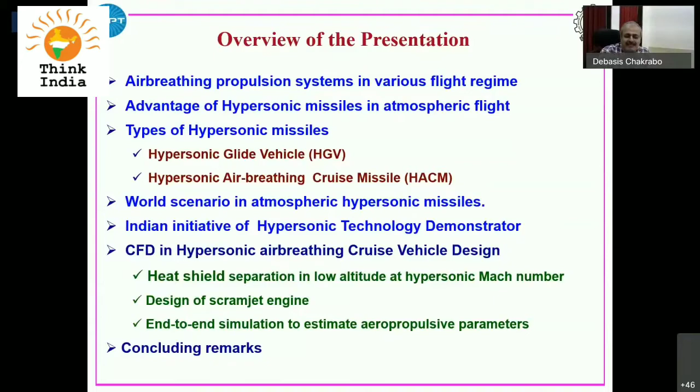Now coming back to how an aerospace vehicle moves in the air - there are four forces: thrust, drag, lift, and weight. Thrust must overcome drag, and lift must exceed weight. If these conditions are met, then a vehicle can fly in the air.

What is thrust? In aerospace propulsion, fuels are burned in the engine and this hot gas is expanded through a nozzle, or sometimes some portion is used to run the turbine and some portion produces thrust. This concept of thrust is very simple.

It is based on Newton's two laws of motion: the second law, force equals mass times acceleration, and the third law, for every action there is an equal and opposite reaction. Thrust is nothing but the difference between the inflow momentum and the outflow momentum. In aerospace propulsion, the chemical energy in the fuel is converted into thermal energy by reaction, and the thermal energy is converted into kinetic energy.

For an air breathing engine, thrust is defined using m dot, the mass flow rate, v the velocity, p the pressure, and a the area.

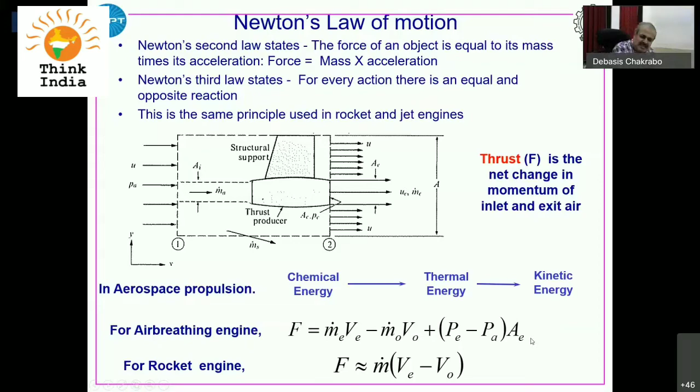Now, if you look at all aerospace engines, they can be classified into two categories: air breathing engines and rocket engines. In air breathing engines, we use atmospheric oxygen to burn the fuel, while in rockets, we carry the oxidizer and fuel on board. Because we are not carrying the oxidizer and are using atmospheric oxygen, the air breathing engine is very efficient compared to the rocket engine.

The various kinds of air breathing engines are turbojet, turbofan, turboshaft, turboprop - these are all in the low speed region. If we increase the speed, because man's aspiration to fly at higher and higher speed is always there, and this is challenging, at higher speed we get Ramjets.

I will briefly explain the Ramjet. The other area is solid rocket, liquid rocket, and hybrid rocket, but I will not be touching upon rocket propulsion in today's lecture.

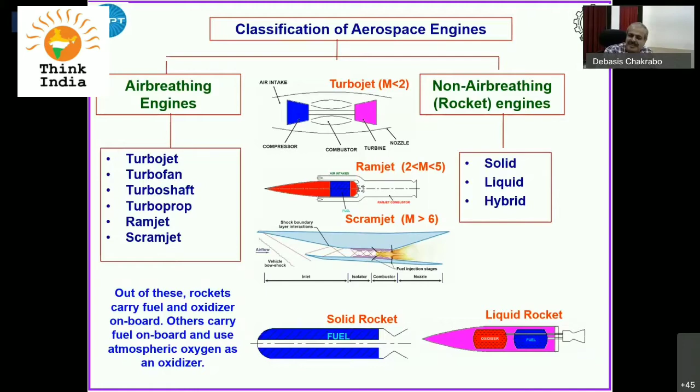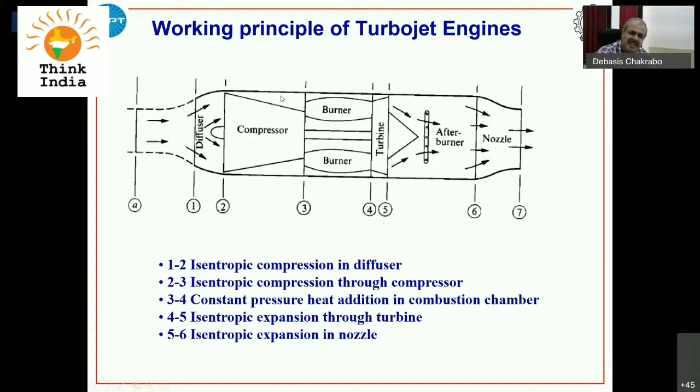Now, how does this work as we fly in the aircraft? How does the engine work? The flow enters the engine through a diffuser, the intake. Then this flow goes into the compressor, where the pressure increases. That high pressure gas is put into a burner, the combustor, and there we get high temperature. That high temperature, high pressure gas is used to run the turbine, and the turbine is required to run the compressor. This hot gas is then expanded through the nozzle to get thrust. This is the working principle of the turbojet engine: inlet, compressor, burner, nozzle.

Now, if you increase the speed, suppose going to Mach 2, twice the speed of sound, nearly 600-700 meters per second. That is the velocity.

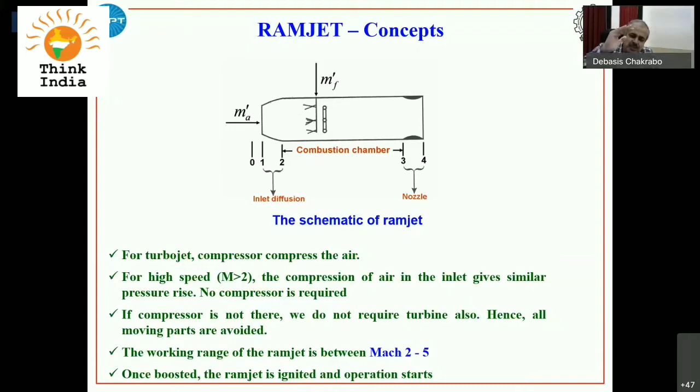If we can compress the flow to a subsonic value, we get a pressure rise, similar to what we get across a compressor. So if we fly at higher speed and decelerate the flow properly through an intake, we don't require a compressor. If we don't require a compressor, we don't require a turbine. So all the rotary systems can be dispensed with. We get a very simple system: intake, combustor, and nozzle. This is a very efficient propulsion system in the range of Mach 2 to 5. It has to be first boosted, and then the ramjet is ignited and operation starts.

So there are many types of ramjet. In DRDO, we developed a few ramjet powered missiles, and you must have heard the names Akash, BrahMos, which have been put into service. Some flight videos I would like to share with you.

This is the Akash flight trial, a very short video.

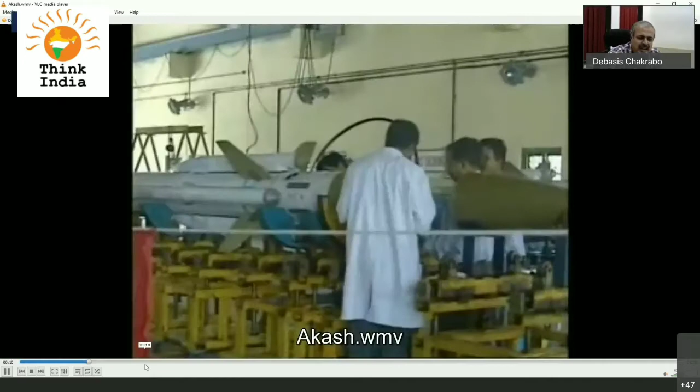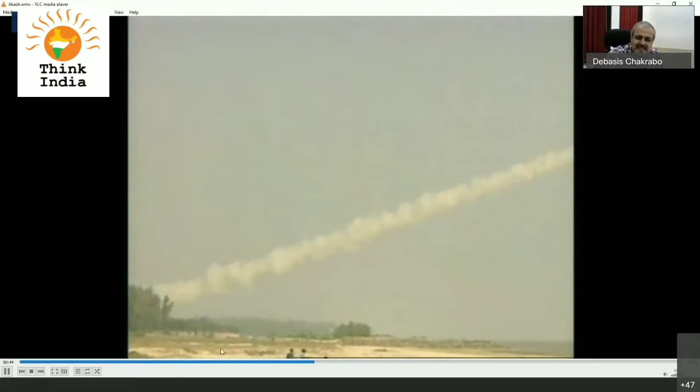There's a lot of other stories; sometimes I'll tell you how it works. We have worked quite a long time to develop this. It is a totally indigenous system, and it has been deployed in various parts of our country to safeguard the territorial integrity of the nation. It is one of the major workhorses for both our Army and Air Force.

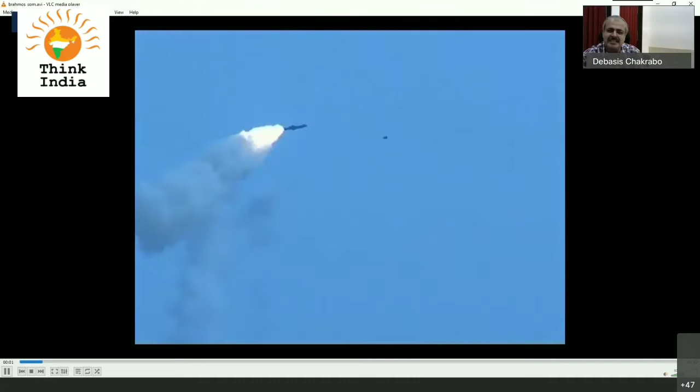Another video I would like to show is the liquid fuel ramjet. This is BrahMos, developed jointly with the Russians. This is some of the flight trial footage.

Now we have mastered the technology of ramjet propulsion. If we increase the speed further, as I mentioned, ramjet is very good in the Mach 2 to 5 range. It is a very good, efficient propulsion system.

But if you want to fly at even higher speed, suppose we get into Mach number 6. If we again decelerate the flow, the pressure increases, which is desirable, but at the same time temperature also increases. In very high speed flows, if the temperature increases, we cannot add fuel to that stream, because most of the energy will go into dissociation. So on the other hand, we cannot decelerate the flow to a subsonic value.

So we have to keep the flow supersonic, and we have to add fuel, and the reaction has to take place. Now, if the speed is higher, the residence time of the oxidizer in the combustor is very small. So in that short time, how do we ignite the fuel and release the energy? That is the real challenge. This Scramjet propulsion is, I would say, state-of-the-art technology. Very few countries have mastered it, and this is the power plant for every hypersonic missile.

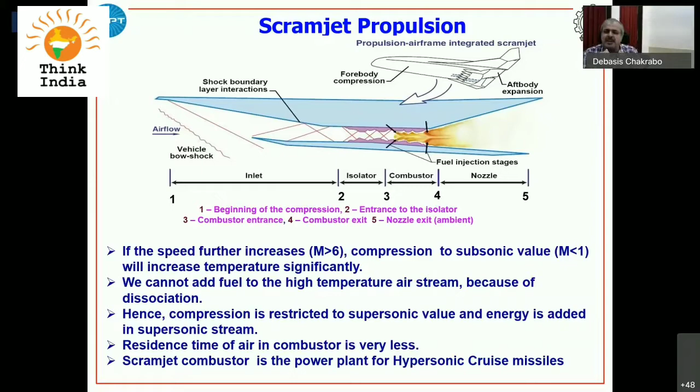Now, if you look at the performance, I've just compared that. I told you that in various Mach number regions, various propulsion systems work. So this is the turbojet, this is the ramjet, then the scramjet can work for a longer, larger Mach number range. And performance-wise, it is also much superior to the rocket engine.

Just to give you an example, for a rocket, liquid or solid, the ISP, the specific impulse, which is the parameter for every fuel, is of the order of 300. The maximum a cryogenic fuel will get is 400, 450. But in air-breathing engines, I mean the scramjet or the ramjet, we get an ISP of the order of thousands or more.

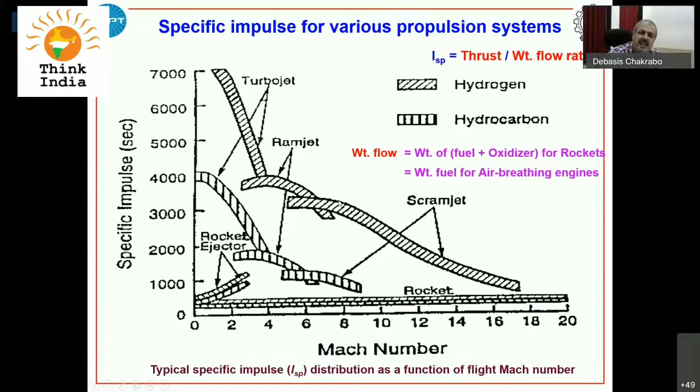And why do we need hypersonic missiles in atmospheric flight? The first thing is faster response. Suppose we have to travel 300 kilometers and attack some enemy position. If we go at subsonic speed, like 800 kilometers per hour, it will take 22.5 minutes. If we increase the speed, it will reduce to 5.2 minutes, and at hypersonic speed 2.2 minutes.

Now, this advantage will be greater as the distances increase. If we have to travel 1,000 kilometers in a subsonic missile, it will take 75 minutes; a supersonic missile like BrahMos at Mach 2.8 will take 17 minutes; and the hypersonic Mach 6.5 missile we are trying to develop will take 8.8 minutes.

I'd like to share one small incident with you. In 1998, American intelligence found the hideout of Osama bin Laden, the terrorist. They fired their Tomahawk missiles from the Persian Gulf position. The Tomahawk missiles were traveling at subsonic speed, and it took nearly 2 hours to come from that base to hit these caves in Afghanistan. By that time they also got the news, and they left the cave. Although the missiles came and destroyed those caves, nothing could be done to Osama bin Laden.

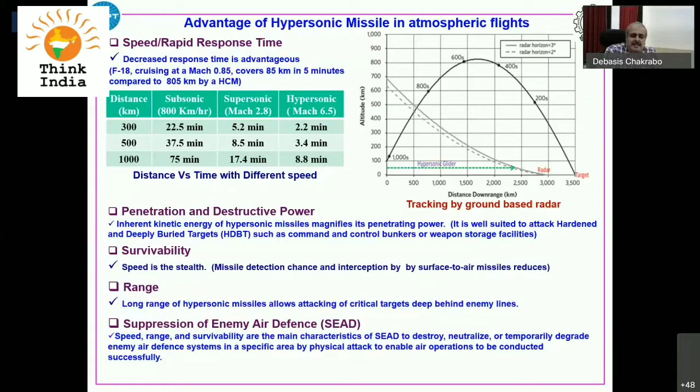Now, there is another advantage: because it is traveling at very high speed, like Mach 6, it has tremendous kinetic energy, and the penetration power is also very high. So these types of targets include time-critical targets, like enemy forces in transit, terrorists fleeing in a vehicle, mobile theater missile launchers, mobile surface-to-air missiles, high-value military cargo, mobile command and control vehicles,

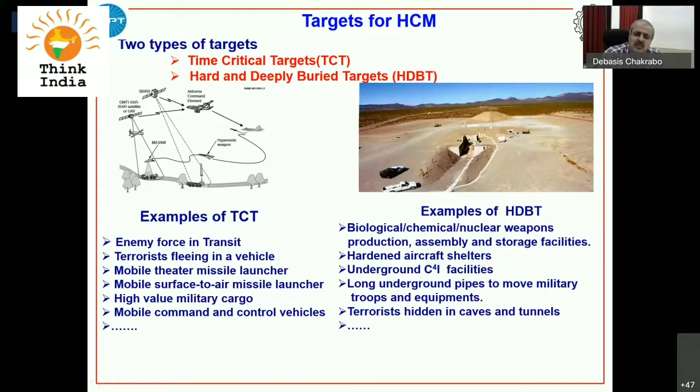and then hard and deeply buried targets: biological, chemical, and nuclear weapons production, assembly and storage facilities, hardened aircraft shelters, command centers, underground C4I facilities, and the list goes on. For these kinds of targets, conventional missiles are not very useful. We have to develop hypersonic missiles for this.

If you look, there are two types of hypersonic missiles. One is called the hypersonic glide vehicle. In the hypersonic glide vehicle, we take the missile to some altitude, and then it does aerodynamic maneuvering, comes back and hits the target. But there is no propulsion. On the other hand, in hypersonic cruise missiles, we have active propulsion until the end, up to the target. If you have propulsion, you can maneuver the missile much better.

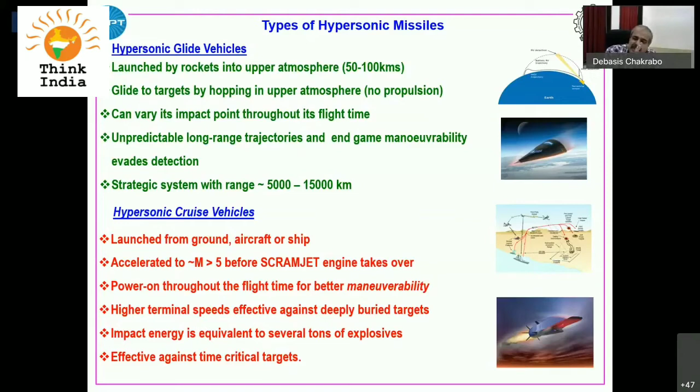So the hypersonic glide vehicle, by its higher speed, avoids any interception. And the hypersonic cruise missile has both speed as well as power, so that it can maneuver. And if you look at the world scenario in hypersonic glide vehicles, Russia has developed Avangard.

It reaches speeds up to Mach 27. These things were developed in the 2015-16 time frame. And USA has developed HTV-2. This will also go up to Mach 20, and the range is of the order of 7,000 kilometers.

China has also tested the WU-14 in 2017. In India also, we are developing the hypersonic glide vehicle. I'm not going to talk about it, but in this presentation I will mostly discuss the issues of hypersonic air-breathing cruise missiles.

Now, in hypersonic cruise missiles, the USA has developed two major programs. One is called X-43, with hydrogen fuel, and one is X-51, with hydrocarbon fuel. For military applications, hydrogen fuel is not preferred because of space limitations. Hydrogen requires a very huge tank, so the drag will be more. For space programs, hydrogen can be used.

In this mission, they took the booster and the cruise vehicle on the B-52 bomber. They released it at nearly Mach 0.8 to 1.2. Then a Pegasus booster took it to the Mach 6 or Mach 7 condition, and they demonstrated the operation of the X-43.

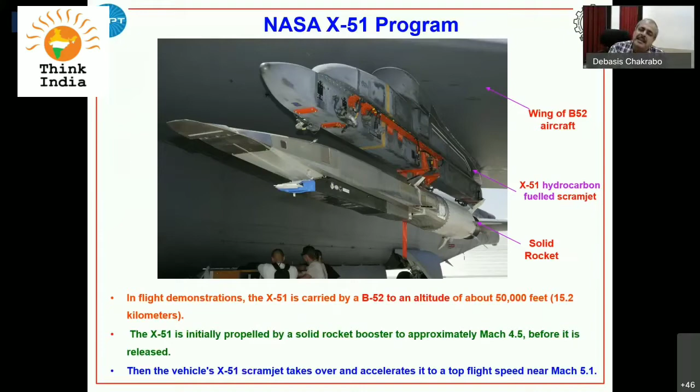Just to summarize, a lot of countries are developing these. It started with the National Aerospace Plane in the USA, and a lot of technology was developed, but finally the project was stopped and there was no flight trial. The USA and Russia together developed a NASA-CIAM test. Australia has done some flight trials of the scramjet engine, but they don't have much practical relevance because it is in captive mode. They put the scramjet engine in a sounding rocket and tested it.

HIFiRE, Australia, is another smaller-scale one. X-51, I have already told. Some 2-3 years back, ISRO also tested a scramjet engine. That is also a captive trial: they put two engines on a sounding rocket, and without separating the engines, they tested and demonstrated the scramjet engine.

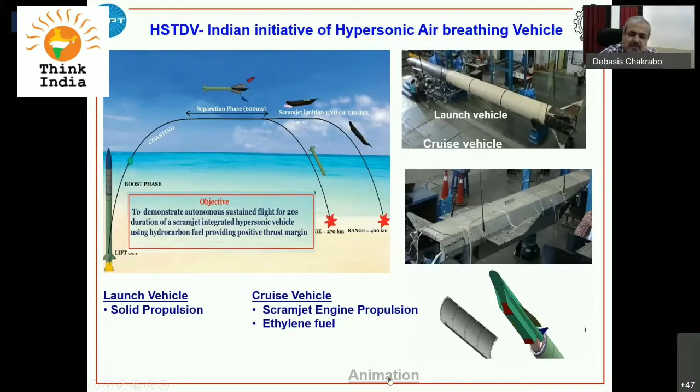And now how we have solved that problem, how we have designed it, and because in our country we don't have that kind of test facility to do those tests, we have to depend on our numerical methods. I will explain that. And the whole concept of this HSTDV, I would like to explain through an animation.

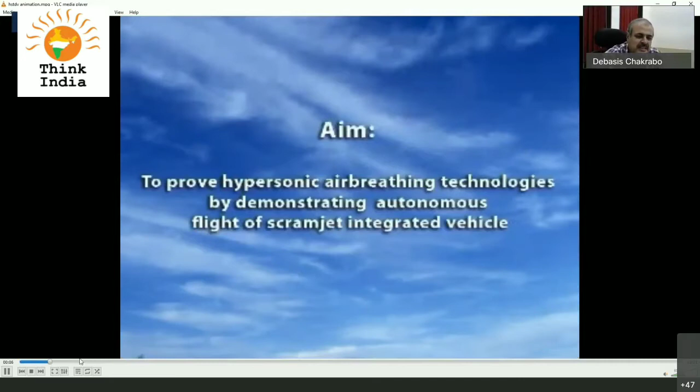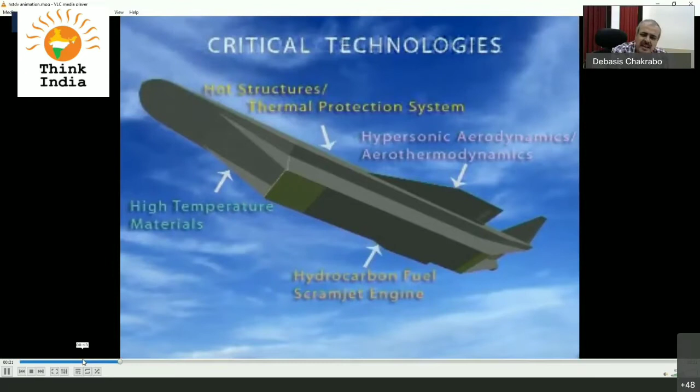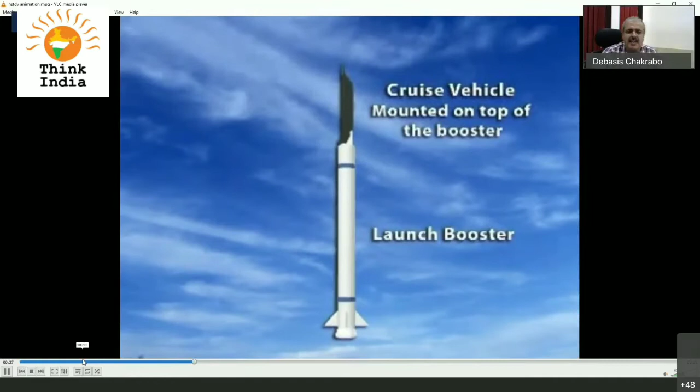This is the cruise vehicle where the Scramjet technology will be tested with the hydrocarbon fuel. There are a lot of critical technologies like hypersonic aerothermodynamics. These are the vehicle forebody, intake, combustor, wing, tail, and the Mach 6.5. This is the launch booster. We have put the cruise vehicle over it, covered it with the heat shield, and then we are firing from the ground with a ground launcher.

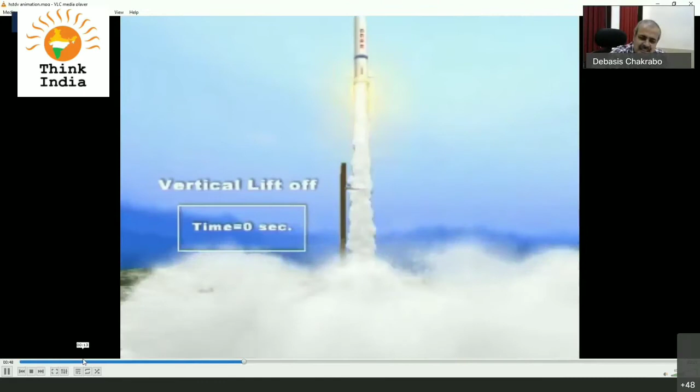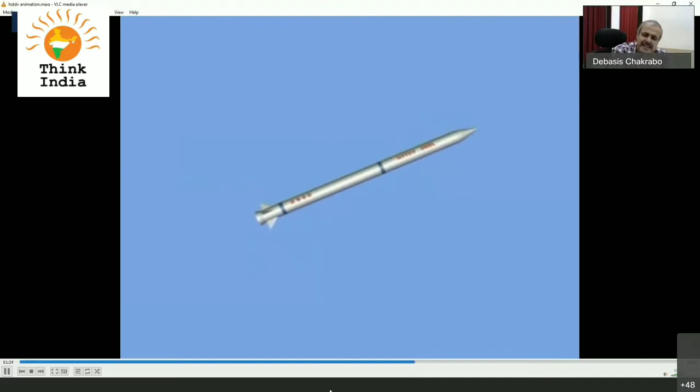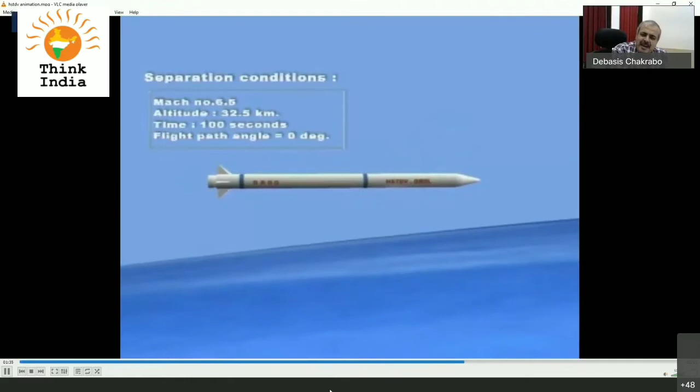Then after the burnout, coasting is taking place and it is gaining altitude. We are taking the turn to make it horizontal. Then when Mach number 6.5 is reached, the heat shields are separated. There are two: one is the nose panel, one is the cylindrical panel. Then the cruise vehicle is exposed, all the control surfaces are deployed, and it is separated from the launch vehicle.

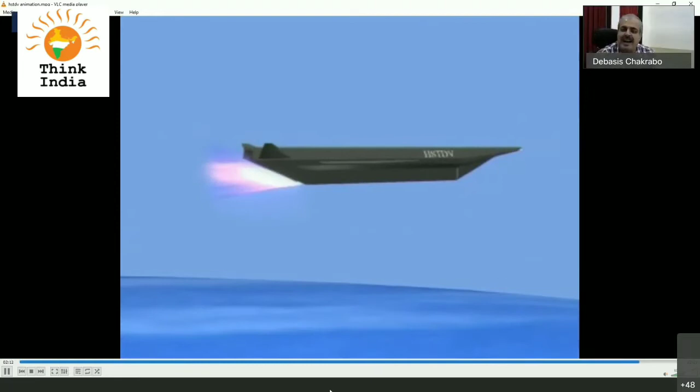Now it is an autonomous aircraft-like structure. The Scramjet engine is ignited. Now, these are the hypersonic test vehicle critical technologies: the hot structures, hypersonic aerodynamics and aerothermodynamics, high temperature material, hydrocarbon fuel Scramjet engine, endothermic fuel development. These are the typical challenges in developing this kind of vehicle.

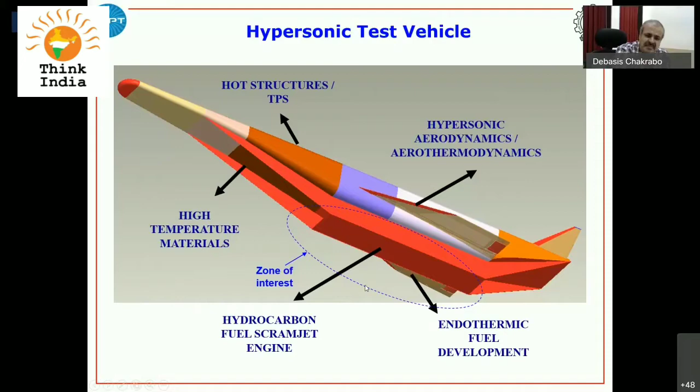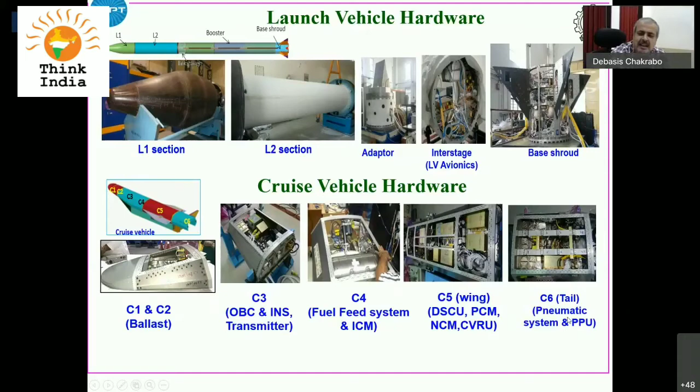We have to do a number of tests because it goes in very severe atmospheric conditions. Dynamic pressure is quite high, so the temperature is quite great. Under those conditions, those structures should withstand. So a lot of thermostructural tests we are doing. A lot of ground resonance tests we are doing to find out the control structure interactions. Then this is the panel separation.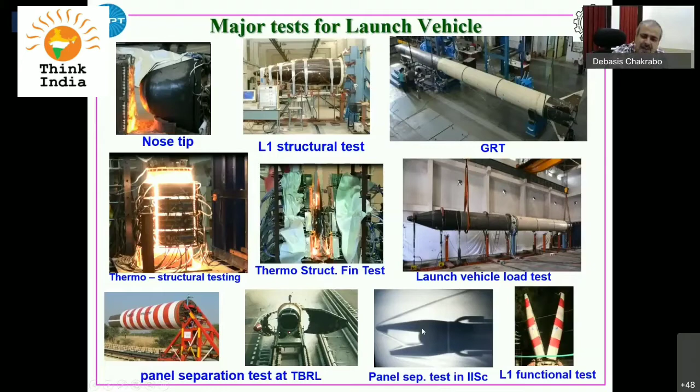I'll be explaining in detail how we have qualified these things without any wind tunnel, how we have done the test. Some of the tests we had to do in Russia, because when we were developing this vehicle, there was no big hypersonic wind tunnel in our country. Of course, we have now developed two big hypersonic wind tunnels in our country, one at DRDL, one at VSSC. In our next development, we need not go to Russia for those tests.

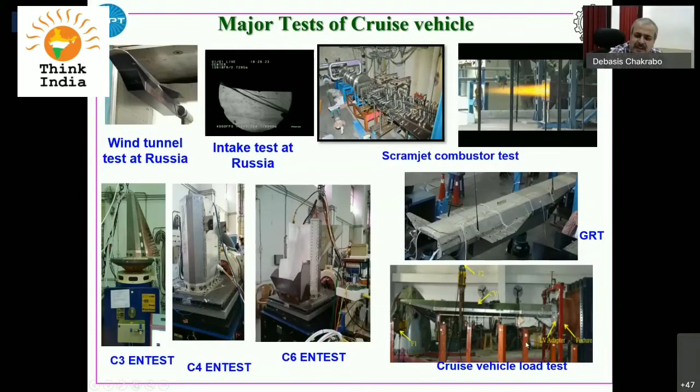The Scramjet combustor tests we have mostly done on ground, and some free jet tests we have done, and a lot of other vehicle tests we have carried out for this cruise vehicle. And a number of new technologies we have developed during this project. This one is the aerothermodynamics, configuration, design, and testing. We can tell with confidence we have mastered this technology. Any kind of hypersonic vehicle we can design.

We have developed the CFD capabilities, and they are all in-house development. I will be explaining some of the capabilities we have developed. The panel separation dynamics is also a big challenge, and we have developed those technologies. Hypersonic air intake characterization, scramjet combustor design, hot structure design, split composite airframe, coating, material characterization. This number of technologies we have developed.

Out of these, today I will be explaining two technologies, the panel separation dynamics and the scramjet combustor design, where I was directly involved. In fact, I have worked for nearly 18 years on those technologies. So I'll be explaining how we have done this work.

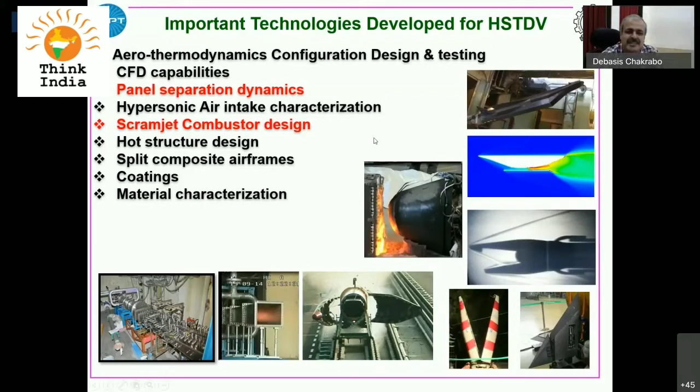These are fairing separation studies of this hypersonic technology demonstrator vehicle. I have explained that in order to protect the cruise vehicle against aerodynamic heating, we are protecting it by a heat shield, and the heat shield has to be separated. And these are all mission critical. While separating, if these panels hit the body, that will be disastrous.

Even a small force is what it will be imparting on the vehicle, and we will not be able to control it. And here we have developed a grid-free methodology in-house in DRDL, and this is a unique development and one of the best in the world, I should say.

Grid-free means we are not using any structured or unstructured grid. We are working on a collection of points, so that any kind of complex geometry we can model without any problem. So this is the beauty of this grid-free Euler solver. If I get a chance, I will be talking about this development in a different forum.

And now, how these panels will be separated. The total heat shield has been divided into two: one is the nose panels, one is the cylindrical panel. And if you look at it, the nose panels are asymmetric. On one side there is a bigger structure; the nose cap is there on one side and not on the other. So it opens asymmetrically, and that gives more problems.

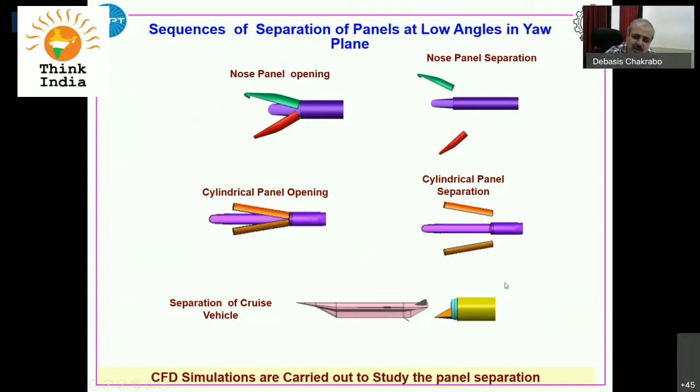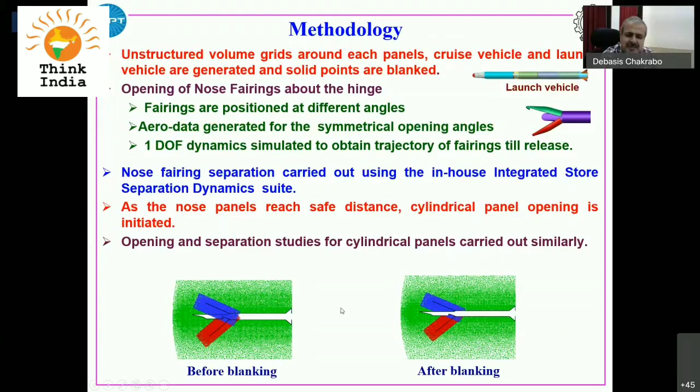This is what we have done: this is the grid before blanking, this is the grid size, and this is after blanking. Thorough validation of this methodology has been done before applying it here. And this is the geometry. In doing these simulations, we have not made any modification to the geometry. The geometry as fabricated, that CAD file, we are using in our simulations.

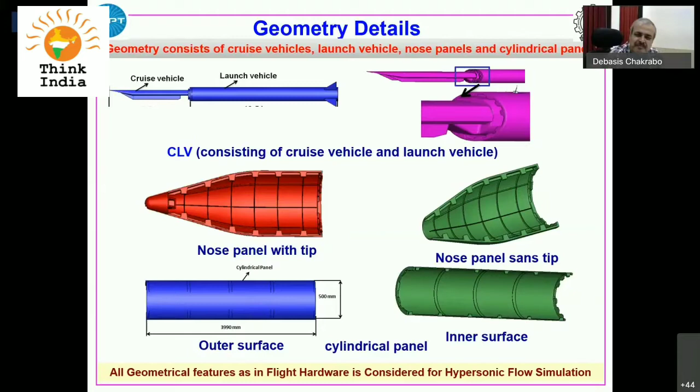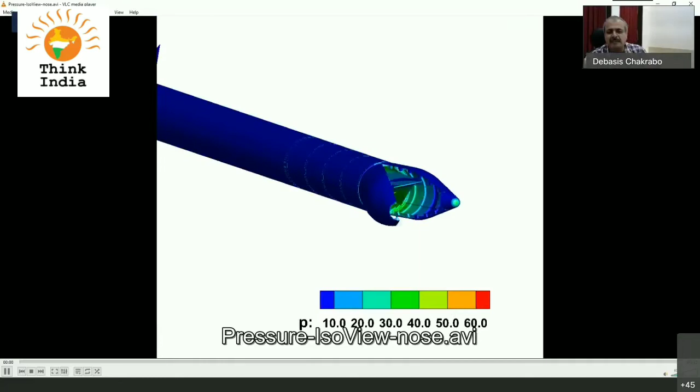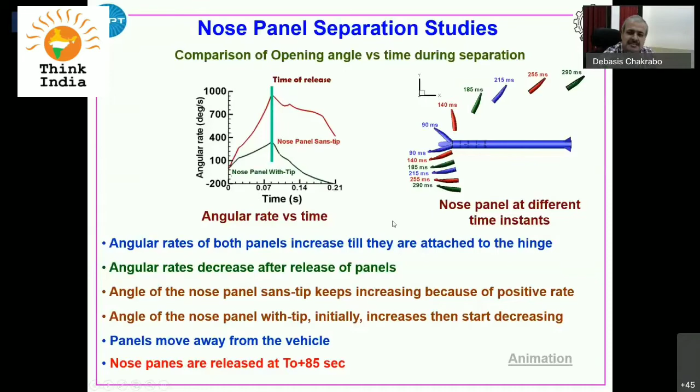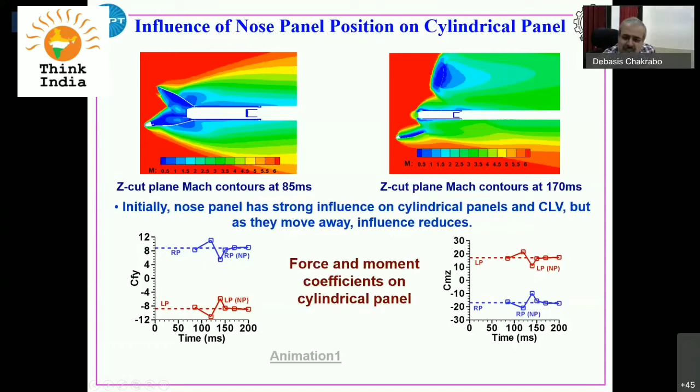To explain this, I'll be showing a small animation of how the panels are getting separated. And this is the pressure field over the surface. Through the simulations, we can see that it is safely going out, and it is not affecting this panel. Now, during the panel separation, it is a challenge to control the vehicle, because these forces will have some adverse impact on the cylindrical panel as well as the main body. The forces and moments have to be calculated accurately, and the control strategies have to be worked out.

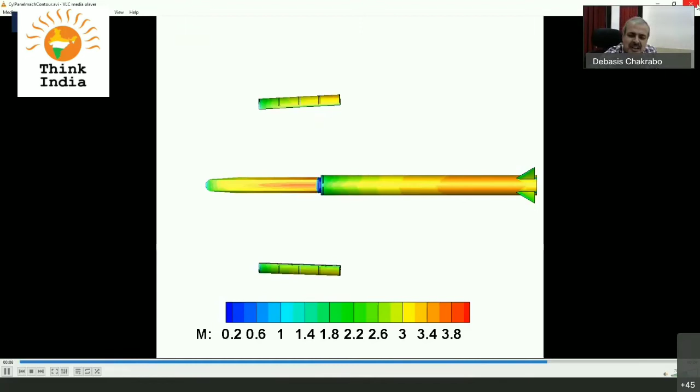Similarly, the cylindrical panel also has to be studied. Then at what time should I initiate the cylindrical panel separation? For that also, I'm showing one animation. So through our simulations, similarly, we are showing these forces and moments. We are calculating the pressure on the body, and once you know the pressure, we can find out all the forces and moments.

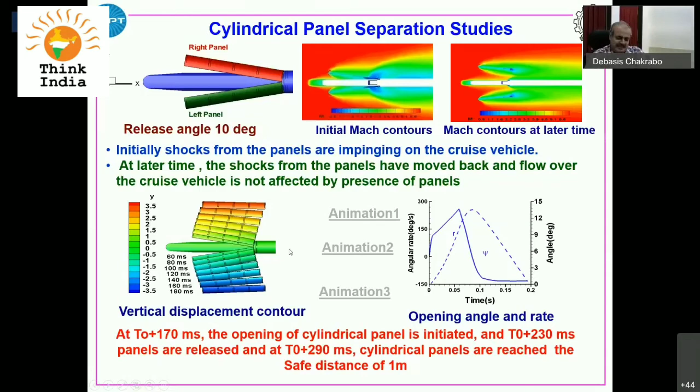So the total sequence of the separation, nose panel separation, cylindrical panel separation, everything has been done through CFD, because when we were designing, we didn't have those testing facilities. Now the question is, this is the design we have done, but we have to validate those design numbers, and also there is a lot of equipment which will be going into the flight, like pyro bolts and hinges. They have to be qualified under these load conditions.

Then we saw there is one sledge facility in one of our DRDO laboratories at Chandigarh called TBRL. There, in a sledge, we can move the vehicle at Mach 1.2, and there is nearly a 4 kilometer range.

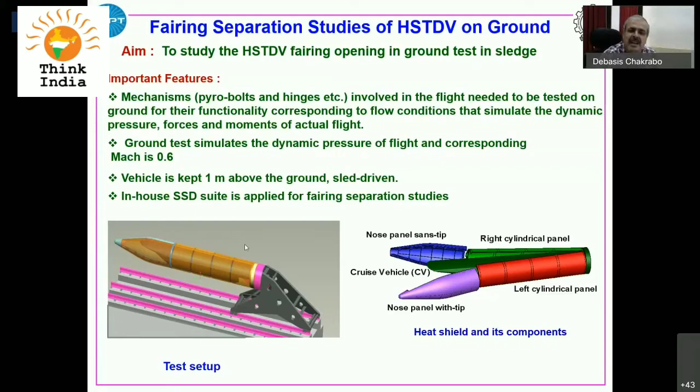Then we thought that if we can simulate the dynamic pressure, like when you are going high in altitude, density is coming down, but the velocity is high. On the ground, I am restricted by the lower velocity, but the density is higher. We have seen if we move that sledge at Mach 0.6, the dynamic pressure between the flight and the ground test are matching. So at least the forces we are able to simulate.

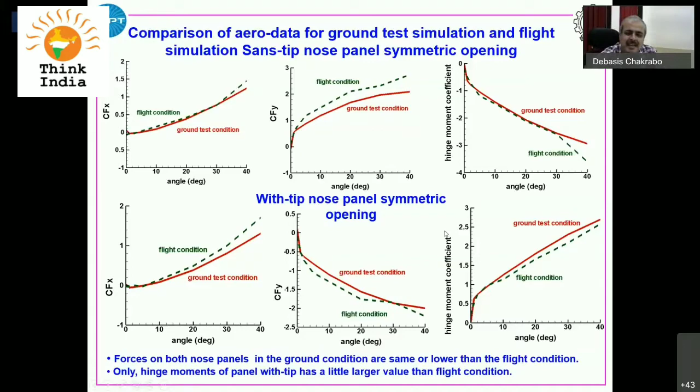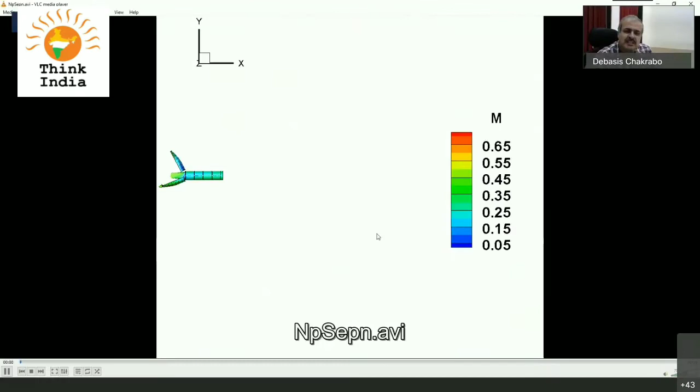Mach number we will not be able to simulate, but the forces experienced by the vehicle will be simulated. And under that condition, if we predict and if we can measure those things, then that will give us the confidence. So in the ground condition, the flight is Mach 6 and above, but here 0.6 we have simulated, and this has shown that it is separating very safely.

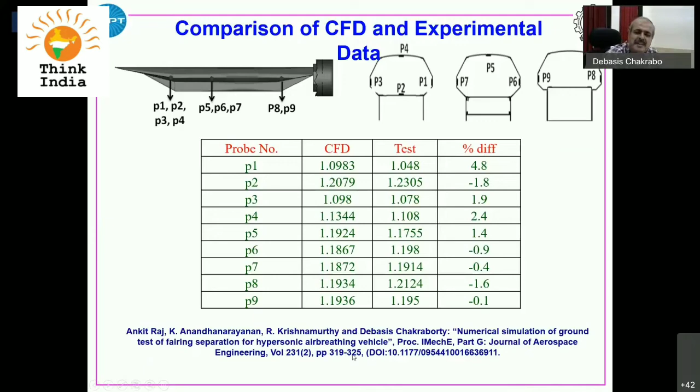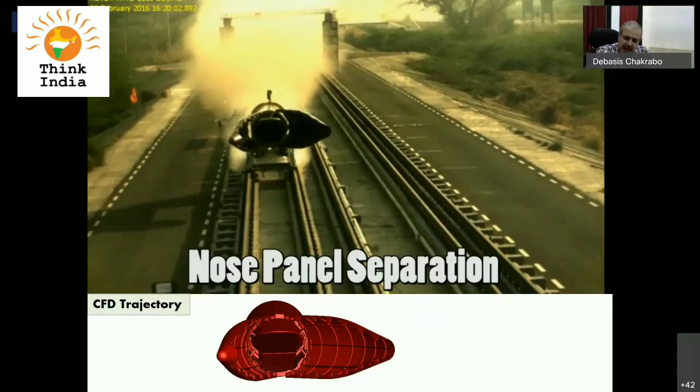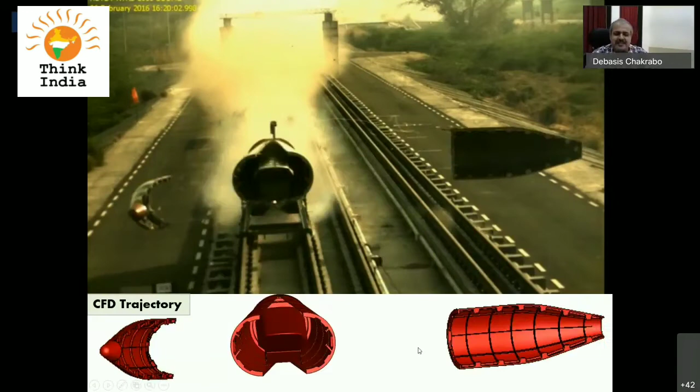I would like to show it once more to tell this: the upper one is the test data, and that is our prediction. It is matching so nicely, and that has given us the confidence to go with the flight trial without any other test.

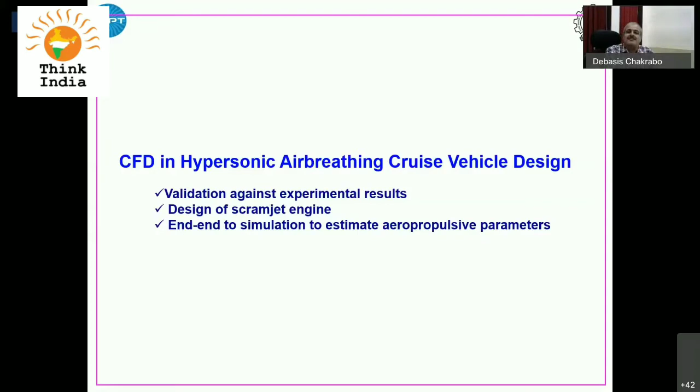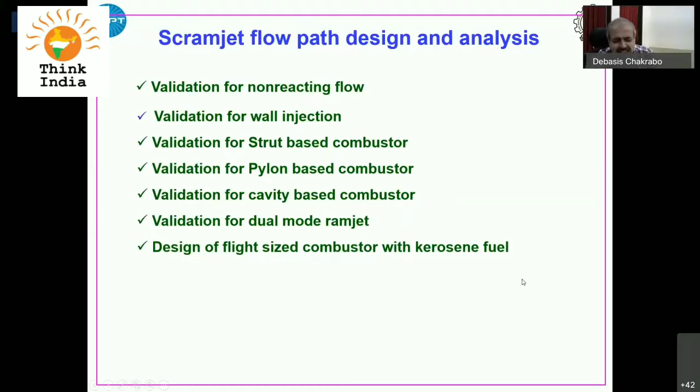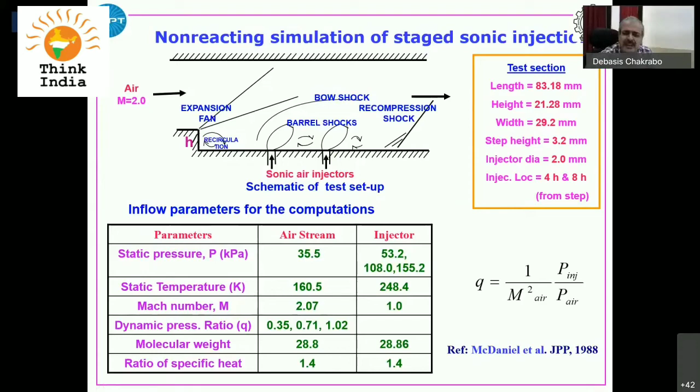Now I'll be changing to another problem, that is how CFD has been used to design a scramjet combustor. So first, we have taken the numerical methods we are using. We have validated them on a number of cases for non-reacting flow, various types of wall injection, the strut-based combustor, pylon-based combustor, cavity-based combustor. Wherever there is literature data, we have taken it and compared our results. There are nearly 25 different experimental conditions reported in the literature. We have taken and compared them. That has given us the confidence that this is the method we can use for our design.

I'm not going to describe all those details. They are there in many publications, and these are our own tests. This is a Chinese experiment, and this is a NASA experiment done to validate their CFD codes. And what we see, our code is matching better than their well-known CFD code Vulcan. Various types of chemical models also we have seen, because hydrocarbon and hydrogen reactions require a turbulence chemistry interaction model to be developed. We have done extensive work on it.

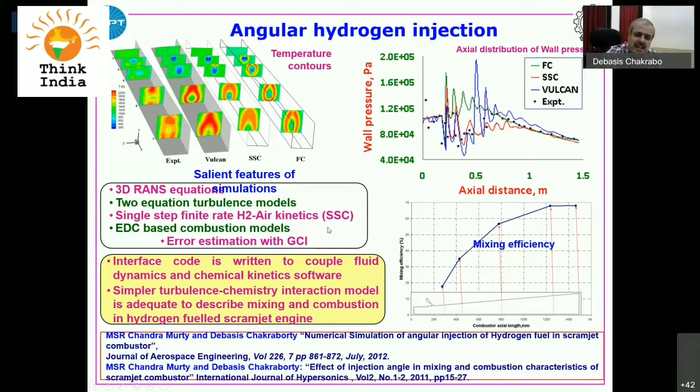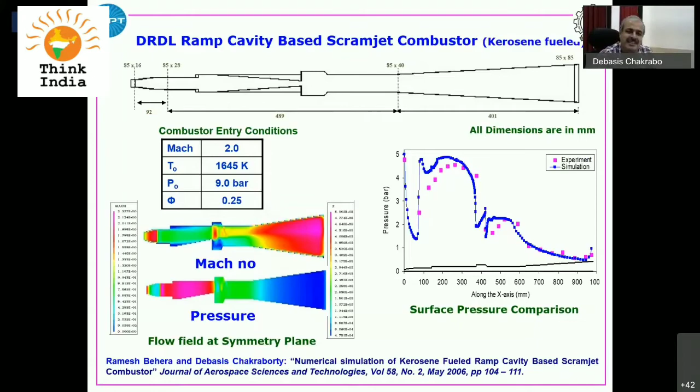And this is a Chinese experiment. This is our own DRDL experiment that we have compared. And really, we are very fortunate. At that time DRDL authority made it a point they will not be doing any test unless there is a prediction. So the prediction is always there before doing a test. So that gives this confidence. Then we have seen various turbulence models, which kind of turbulence model we'll be using, and so we could calibrate our code.

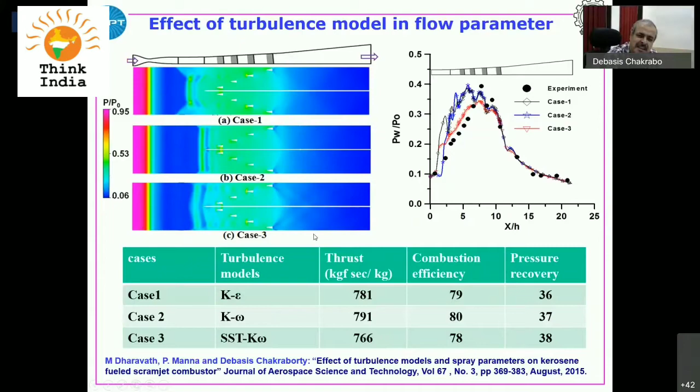Now, to summarize the validation studies, the well-resolved CFD simulation is capable of capturing the essential features of the scramjet combustor flow. The use of fast chemistry predicts the wall pressure higher in the fuel injection zone, but in the divergent portion of the combustor, which is the major thrust producing element, the computation predicts very well. And whatever we have predicted, compared with test results both in the literature and in ground-based tests, we could predict within 5%. The SST k-omega turbulence model has performed better. And as I told, more than 25 experimental reacting flow conditions were simulated.

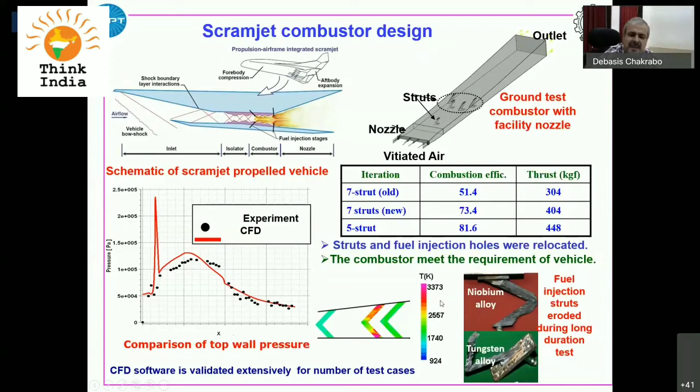So then we thought, where is the maximum erosion? There we are getting the maximum temperature. So from the CFD, we redistributed the strut locations. Earlier we were only thinking from the performance point of view, the pressure, whether we are able to get the thrust or not, but we were not addressing the thermal point. So when we noticed that problem, we redistributed the struts and the fuel injection pattern.

You could see that earlier at those strut locations we were getting very high temperature. So here we tried to see where I will allow the reaction to take place. The reaction should not take place very close to the surface. So we put the injectors in such a way that, because the kerosene we are injecting will take some time to evaporate, before that it will come to the gas phase and then the reaction will take place. This way we modulated it such that the temperature on the struts was reduced.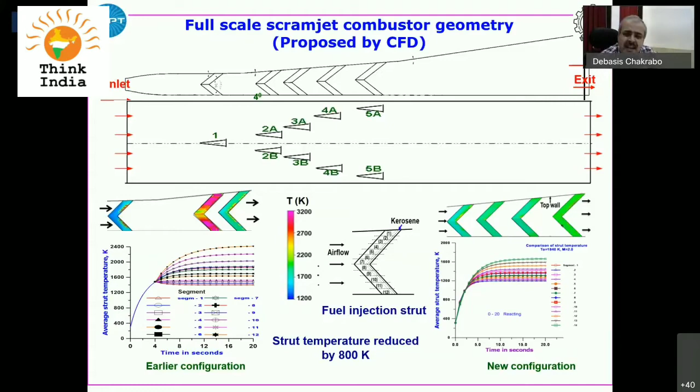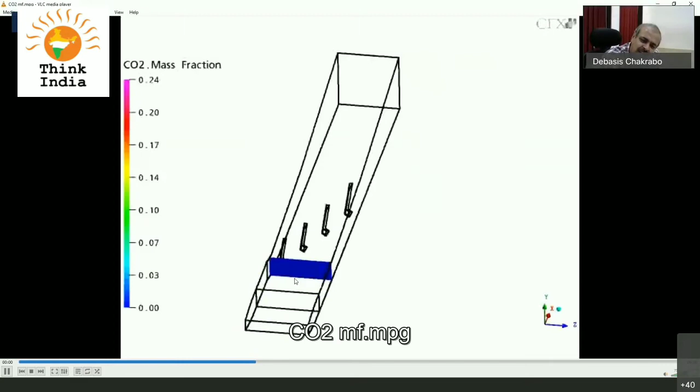This is what we could do because we are seeing the flow field totally from one end to the other end, at various cross sections. I know what the flow field is. Similarly, the kerosene and air reaction gives you carbon dioxide. Where there is no carbon dioxide, there is no reaction. Now the reaction is starting, and at the end I see whether the reaction is complete, and whether the fuel and oxidizer are well mixed or not.

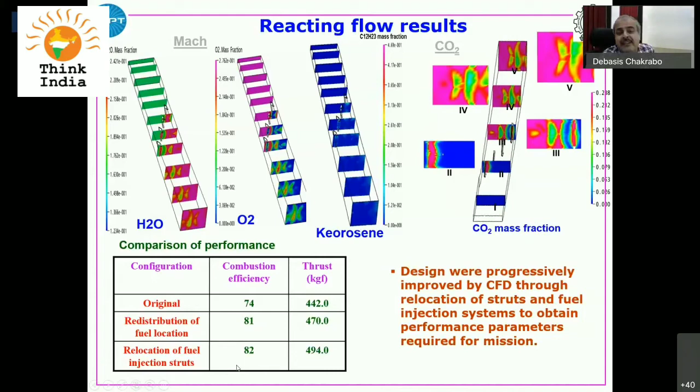The design was progressively improved by CFD through relocation of the struts and fuel injection system to obtain the required performance parameters. Originally we started with 74% combustion efficiency, thrust was 442. With relocation of the struts and the fuel, we got nearly 500 kg thrust. This new design was tested. Earlier, niobium alloy and tungsten alloy were all getting melted; now with stainless steel, we could do the test for 20 seconds.

The same hardware was tested 5-6 times, and the same hardware was also flight tested. By modulating the fuel flow through understanding of the flow inside the combustor, this has helped us solve the thermal problem. And you can look at it - whatever the prediction, whatever the measurement, it has matched very nicely.

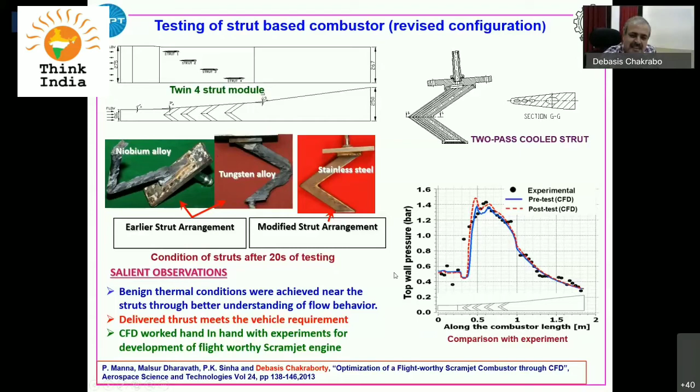Then that was done with the single module, and with the two module we have done the prediction. Whatever experiments they are doing and whatever prediction they are doing, they are all matching.

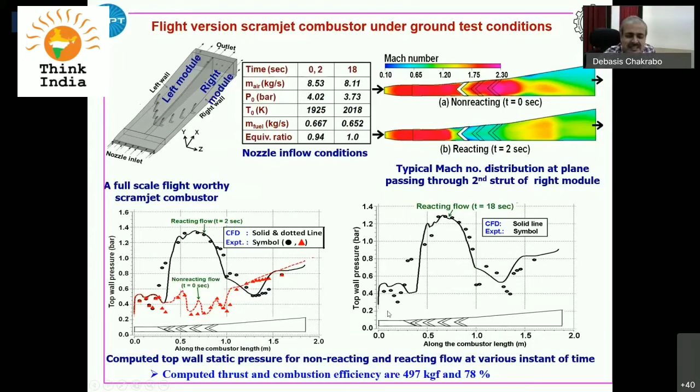Another important problem in this, high-speed propulsion - aerodynamics and propulsion are strongly coupled. You cannot solve it separately. In rocket propulsion, we can separately do the aerodynamics and separately do the propulsion. But in air-breathing propulsion, they should be done simultaneously, because the intake also gives some forces, and the nozzle cowl also gives forces. The total aero-propulsive parameter has to be solved in one go.

So then we have taken the cruise vehicle and made this structured grid. There is an issue in the reacting flow calculation - we cannot use an unstructured grid, because with an unstructured grid our life would be very simple, but in the reacting flow calculation, since the flow is not aligned to the grid, there will be a lot of artificial diffusion, which can participate in the reaction and give a higher performance which we will really not be getting.

After understanding it, we have made a structured grid. In one case, it took more than 2 to 3 months to make a grid, and then another 2 months to run it in a 3000 core machine in DRDO.

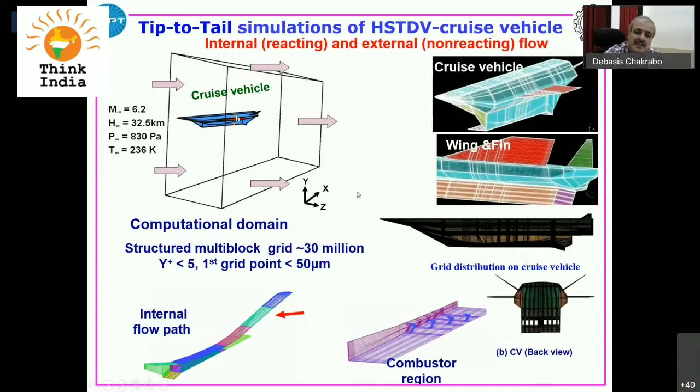And then we can know what are the flow parameters - Mach number, static pressure, static temperature. In the reacting flow calculation, what is the water mass fraction or the carbon dioxide mass fraction, temperature. So what kind of effect on this angle of attack - at 6-degree angle of attack, what is the performance, and this is the surface pressure, what will be the thrust.

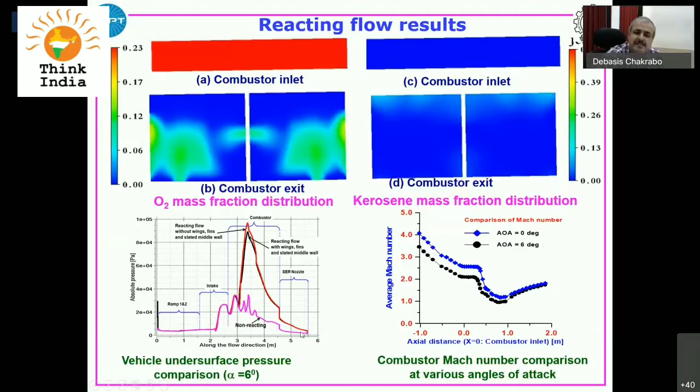Then we have made the total design chart - at various Mach numbers, various altitudes, various angles of attack, what is the performance, what is the thrust, and what are the forces and moments. And that is going into the mission design, using this CFD generated data, because testing for all those conditions is very, very difficult.

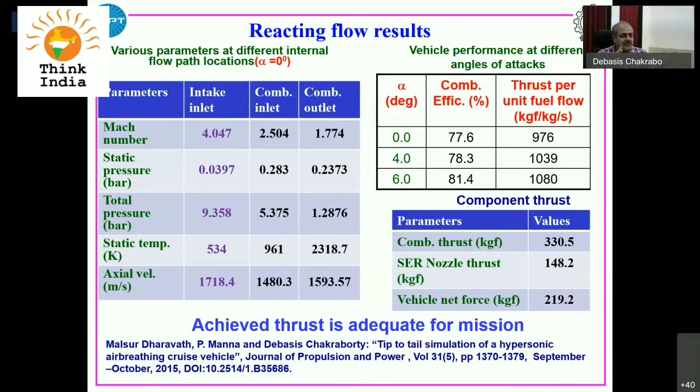So after this successful flight trial, we are working for a long-range mission where the Scramjet engine - now this we have tested for 24 seconds, but now this has to be worked for 1000 seconds.

There are a lot of material issues, a lot of issues with this endothermic fuel. The thermal management of these things for a long duration flight is a very, very critical issue, and we don't have that kind of mechanism.

Materials also have to be developed, and all those critical technology gaps we have identified: starting and unstarting characteristics, laminar turbulent transition, endothermic fuel, ignition simulation, active cooling studies, aerothermoelastic studies, droplet breakup, high temperature material. Then we don't have free-jet test facilities.

We have to do this multidisciplinary optimization for accurate, efficient design. These technology gaps are planned to be bridged through in-house development and academic interaction through the hypersonic vertical of the Centre of Propulsion Technology.

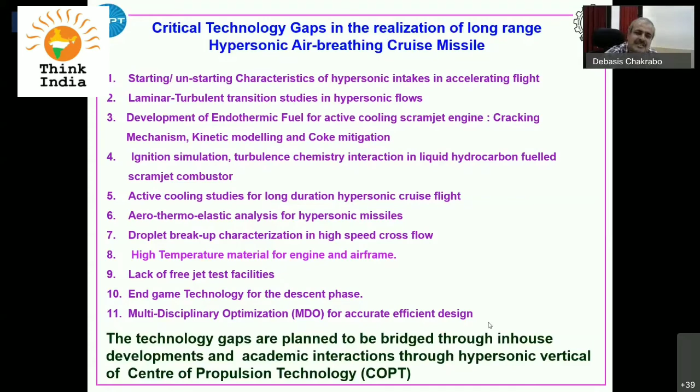In concluding remarks, I would like to say hypersonic missiles are a game changer in modern warfare. The world scenario of hypersonic vehicles - the glide vehicle and the air-breathing cruise missiles - is reviewed. We have described the Indian initiative for the technology demonstrator.

Many new technologies are developed for the mission. For that, I have just explained 2 technologies. Similar development and similar success stories are there for the other technologies also.

We have used CFD methods extensively to design this vehicle. We require to do a thorough validation before it is used in the design exercise.

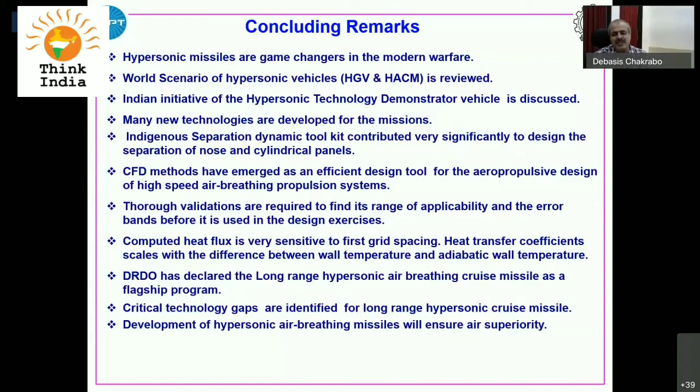DRDO has declared the long-range hypersonic air-breathing cruise missile as a flagship program. Critical technology gaps are identified for long-range hypersonic cruise missiles, and development of hypersonic air-breathing missiles will ensure air superiority.

I will end my presentation with the flight video, what you have seen.